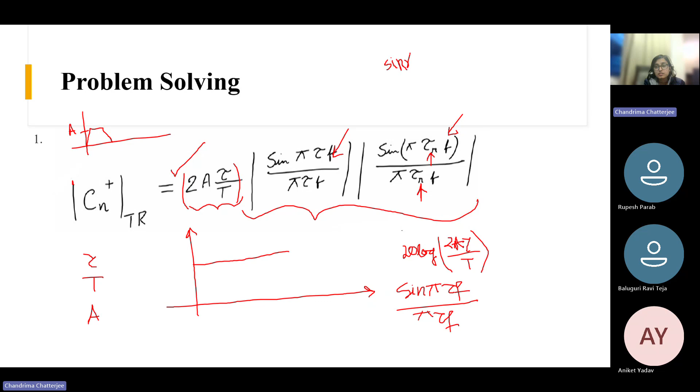when the value of x is very low, we can approximate it; sine x will be very close to x, so x by x will be 1. But when x is much larger, sine x will be at most 1, so the value will be 1 by x when x is large. Fine.

So if you take this, then what will be the asymptote? There will be a break frequency. That frequency will be 1 by pi tau. Okay. Till this point, because this is asymptotic, we can assume it is constant. Then it will have a negative slope of minus 20 dB per decade.

And next we have another portion, this portion. This portion is also a sinc function and we can approximate it just like this, right? The first portion will be constant, obviously. And the second portion we can approximate as 1 by x, so there will be a minus 20 dB per decade slope.

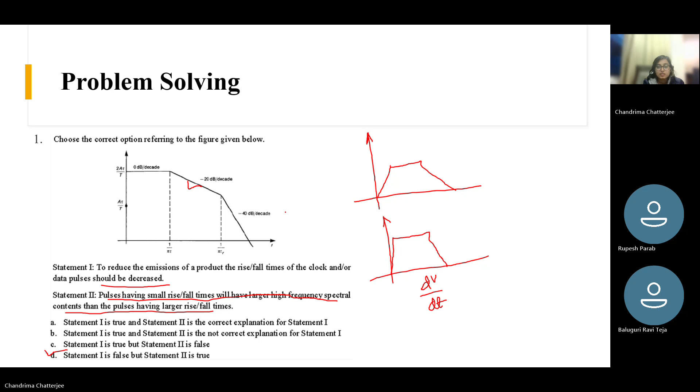So here you can see there is one frequency pointed here, 1 by pi tau, and the second frequency is 1 by pi tau r. These are the two break frequencies, breakpoint frequencies. And where is this coming from? Just follow this expression. What is the term here? Pi tau f. Pi tau f we can also write as pi tau by T. That is one term. Another term is pi tau r by T.

So from here we are getting the first break frequency and the second one. That's why it is written 1 by pi tau and 1 by pi tau r. So how will you get that? Pi tau by T is some angle. If we want to get the frequency, what will we do? Suppose this is some omega t, theta, so it will become 1 by pi tau.

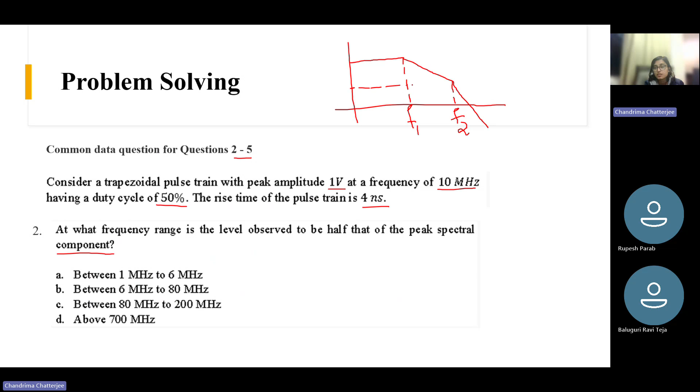So first of all, we get the peak spectral component till this point. This is the peak value. Then it gradually reduces at -20 dB per decade, and then at a higher rate it decays. This is the first frequency, suppose F1, and this is F2. These are the two break frequencies, and this is the peak amplitude. They are asking in which frequency range we will get an amplitude which is half of this value. So suppose at this point this is the half of peak amplitude. So at which frequency range? Suppose at something like this.

Anyway, so what is the first task? The first task is to find out these two frequencies, F1 and F2. So you know what will be F1? F1 is 1 by pi tau. This is the first frequency, right? Where the attenuation begins. So can you calculate and tell what you are getting? So your frequency is given 10 megahertz. You can find out what is your time period. Time period is 1 by f and duty cycle is given 50%. So your tau will be 50% of the time period.

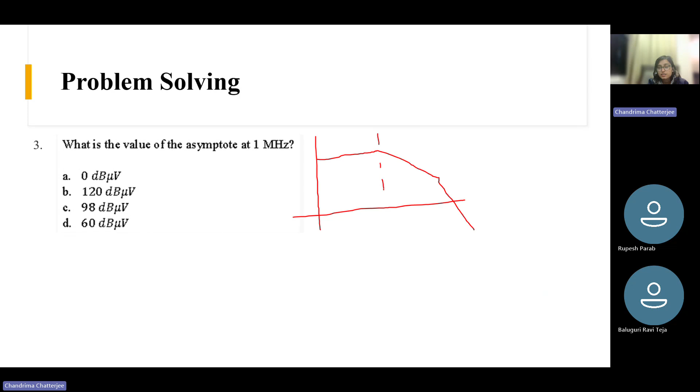Okay, so till this point is it clear? Yes, ma'am. Okay, so what is the value of the asymptote at 1 megahertz? We just now found out that the frequency range is from 6 megahertz to 80 megahertz. So 1 megahertz is obviously below that point; it doesn't fall in that range. We will have to find out the value of the asymptote at 1 megahertz. From start to 6 megahertz, the value is constant. And what is that value? That value is the magnitude, that is 2A tau by T. Okay.

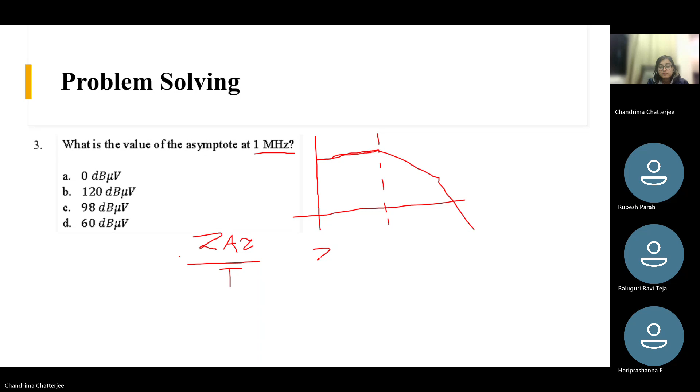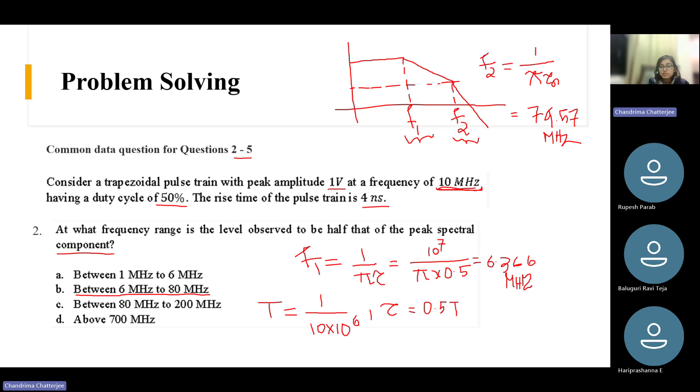That is the magnitude, and we will have to convert it to log scale: 20 log 10 of 2a tau by t. Tau by t is 0.5 because the duty cycle is 50%, and the magnitude is 1 volt, as given. So this becomes 20 log of 1. Log 1 is 0, so this is 0.

So that is 0 dB volt. But here you will have to be very careful: here the unit is not dB volt, it is dB microvolt. We will have to convert it to microvolt.

So we got 20 log 1, meaning 1 volt. If you convert it to microvolt, this is 10 power 6 microvolt. So we are converting it to dB microvolt, and that gives us 120. So 0 dB volt, if you want to convert it to dB microvolt, we will straight away add 120 to it.

Is this fine? Okay, so I have added this question.

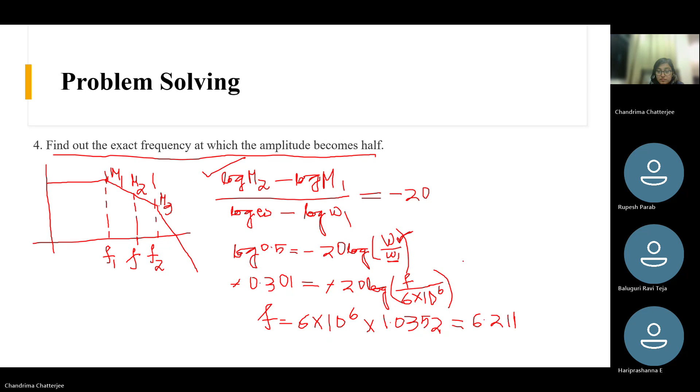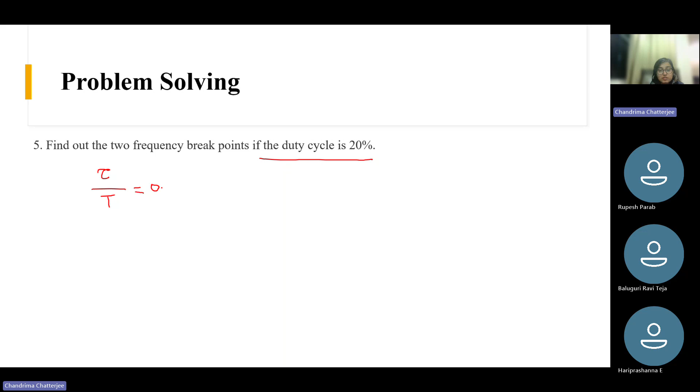So this is very simple, right? We know what is capital T, our time period, because frequency was given as 10 megahertz, so this was 10 power minus 7 seconds, our time period. We just have to multiply 0.2 to find out what is tau. Then the rest is very easy: you just have to find out 1 by pi tau and 1 by pi tau r.

See here, this frequency will remain the same because rise time remains the same. So we don't have to compute this again. This was, I think, 80 megahertz, right? This was 80 megahertz.

Okay, and only this will change the first frequency breakpoint. So basically, this point will change, right? So now we have decreased the tau, that's why this frequency will increase. This frequency will increase. Okay, let's see.

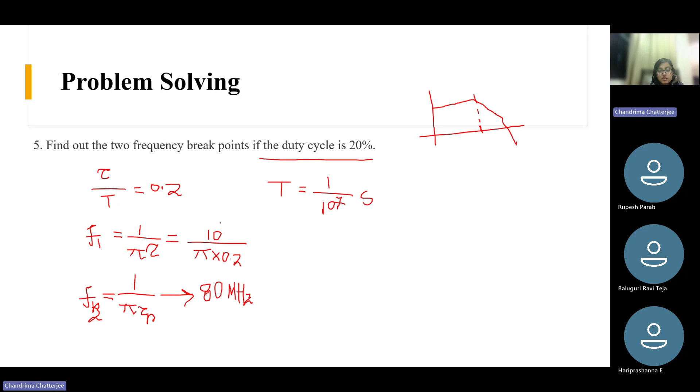So 1 by pi, 0.2, 0.2, and over here we have 10 power 7. Okay. So what is this value? Pi into... so this is 1.591 into 10 power 7, 10 power 7.

Just convert it to megahertz, so 10 to the power 6 will be divided. This is 15.91 megahertz, almost 16 megahertz. So we can see that this frequency has increased. Earlier it was at 6 megahertz, now it has become 15.91 megahertz. Okay.

So we saw what is the effect when we reduce the duty cycle. The more you reduce the duty cycle, the more this first frequency point will increase. It will shift towards this side gradually.

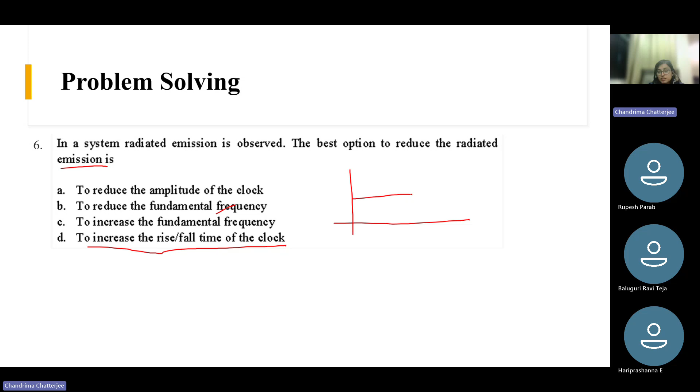So if you reduce the amplitude of the clock, that doesn't serve the purpose, right? Because in that way, your frequency components will still be there. If you reduce the amplitude from, suppose earlier it was here, but now it is here, you are also curtailing your actual waveform because you are reducing the amplitude. And reducing the fundamental frequency also doesn't serve the purpose.

What you will have to do is increase the rise and fall time, as we already discussed towards the beginning - if you increase the rise or fall time, you can shift this point, this minus 40 dB per decade, from where it starts, you can shift this point towards the left, and then you will get more attenuation for the high frequency components. So the way to reduce the radiated emission is to increase the rise and fall time of the clock.

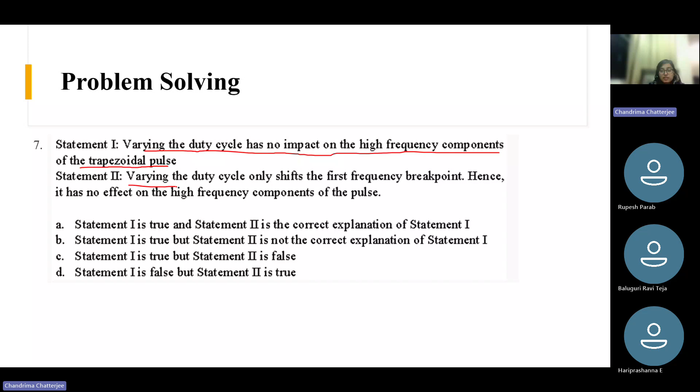The next question: statement 1 is varying the duty cycle has no impact on the high frequency components of the trapezoidal pulse. And statement 2 is varying the duty cycle only shifts the first frequency breakpoint, hence it has no effect on the high frequency components of the pulse. So what do you think? Are the statements true?

First one is true... so we are varying the duty cycle, right? So we are varying tau. When we vary tau, in one question we saw that we reduced the duty cycle, and this first frequency breakpoint shifted towards the right side. It increased, right? From 6 megahertz it increased to 15 megahertz. But does it affect the high frequency components - like what high frequency components you were getting, does it affect it? Now the minus 20 dB per decade slope will start from this point, so this point basically shifts from here to here based on what is your duty cycle. But does the high frequency components change if we change the duty cycle? No, right?

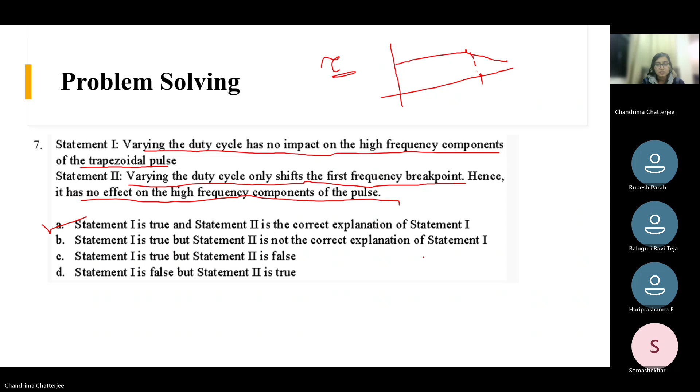Now we will talk a bit about ringing. Most of you must have some experience in PCB designing, so you know that whenever you design a PCB there are some parasitics, right? There will be some parasitic capacitances, some parasitic inductances. Parasitic capacitances are associated with your device. If you're using a semiconductor device, for suppose a MOSFET, there are some parasitic capacitances associated with the MOSFET - the input capacitance, the output capacitance like COSS, CISS, and the transfer capacitance. I think you guys are aware of those things. You also have parasitic capacitances between two points which are at different potentials, and in between there will be some dielectric medium. Also, parasitic inductances we get due to the traces of the PCBs.

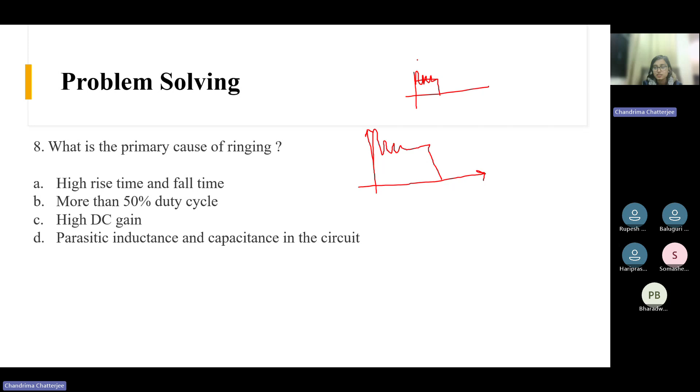So due to these parasitic inductances and capacitances, at a particular frequency they will have resonance, right? And that frequency will cause some oscillations in your actual waveform. Suppose it was supposed to be a perfect square wave, but instead you will get some oscillation, and gradually it will die down because there are some dissipative, resistive components also in your circuit that help damp out this oscillation - but you will get this ringing. That is called ringing. Due to that, there are some overshoots and undershoots in your waveform. In some amount they are okay, but if they are too high, then it may cause damage to your circuit, and it may also cause emissions, radiated emission as well as conducted emissions. So you will have to control this ringing.

So what is the primary cause of ringing? Obviously, the options are high rise time and fall time, more than 50% duty cycle, high DC gain - no, these three options are not correct. The parasitic inductance and capacitance in the circuit, this is the correct option.

But I think for the previous option there could also be a possibility of di/dt, right - the high rise time and fall time. Yes, that is correct, because if your di/dt increases, your inductance voltage also increases, right? Yes, definitely. So if you have a very steep rise time and fall time, in that case you will get very high dV/dt as well as high di/dt. These are basically responsible for your EMI, for your emissions, obviously. But the ringing happens whenever there is some exchange of energy between inductances and capacitances - this kind of oscillation comes when you have coupling between the inductance and capacitance, like an LC circuit, oscillator kind of thing.

Right. So the inductance will provide some energy, the capacitor will get charged, and eventually again the capacitor will discharge. So there is an exchange of energy between an inductive element and a capacitive element, and that causes this oscillation. So if we are specifically talking about ringing, then this is the main cause, right?

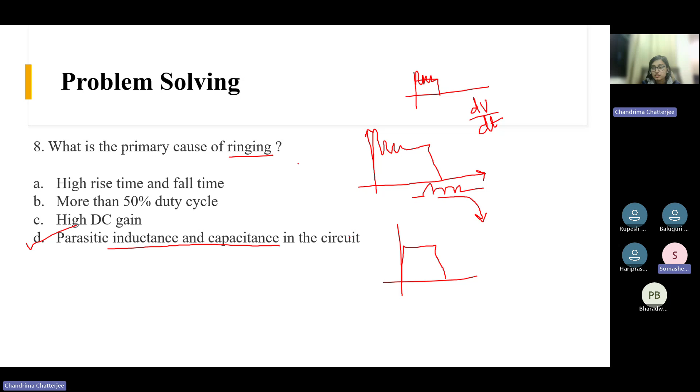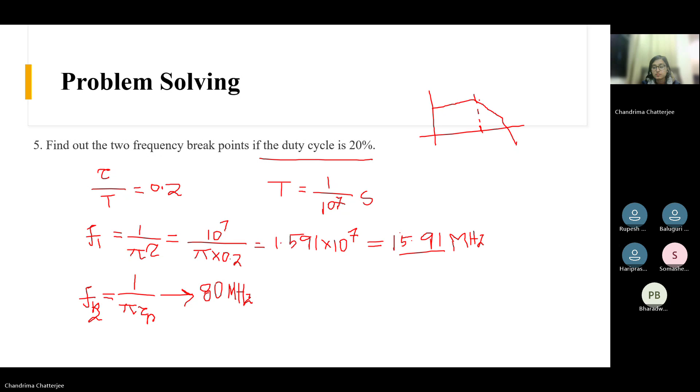So did you join just now or were you there? Yes, ma'am. I have just joined now. Okay. So just to give a brief concept of what we just discussed, I will go to the first slide.

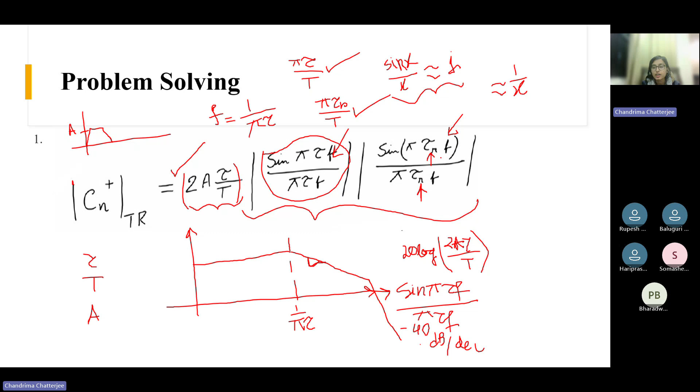Then we have one breakpoint frequency at this point, which comes due to this portion, where we get minus 20 dB per decade slope. After that, we have a similar sinc function at a frequency 1 by pi tau r, where tau r is the rise time. It also contributes minus 20 dB per decade, but we already had a slope of minus 20 dB, so they add up, and we get effectively minus 40 dB per decade slope from this point onwards.

So if the rise time is too low, then this second frequency, 1 by pi tau r, becomes very high and shifts towards the right. So the attenuation that you will get is only minus 20 dB per decade, not minus 40, till this point. Minus 20 is almost like losing half of the signal, but for high frequency components we want more and more attenuation, because those are undesired components.

We don't want them. So the more attenuation we get, the better. The earlier we start to get minus 40 dB per decade attenuation, the better it is for reducing the noise, right?

Again, it depends on the application, ma'am, whether you're talking about microwave signals or kilohertz frequencies. So depending on the application, we choose which attenuation is required. Yes, this is just a general discussion, but for a particular application you may require a particular frequency component. Based on that, you will have to set the frequency and these break points.

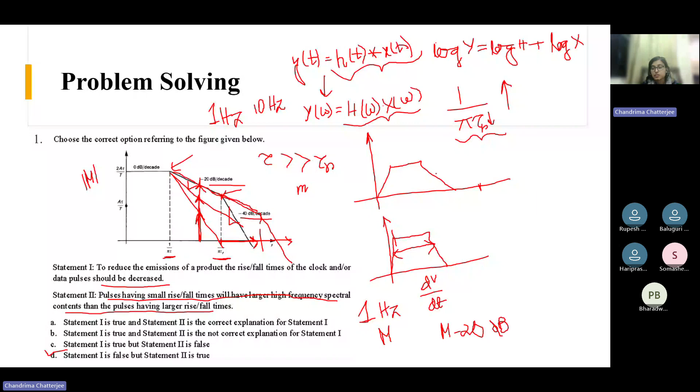Okay, ma'am. Yeah, if it is amplification, then it will be plus 20 dB. This is just a form of representation to make the calculations easier. That's it. Yeah, I agree.

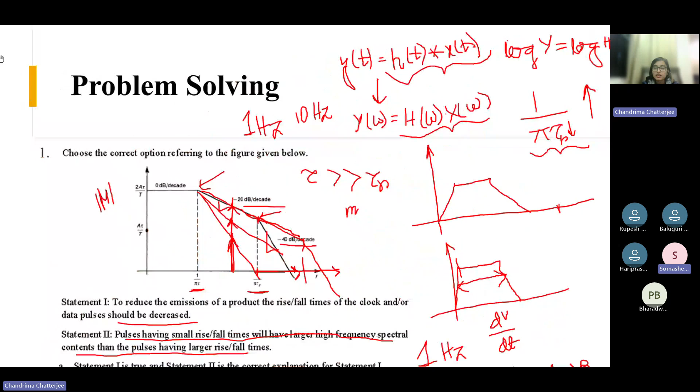Thank you. Ma'am, in what applications will we have plus 20 dB? That I will have to see, I am not sure at this point. There may be some application. Madam, can you correct me? If you take a band pass filter, the rise will be positive, and a high pass filter also. Yes, exactly, a high pass filter, for example.

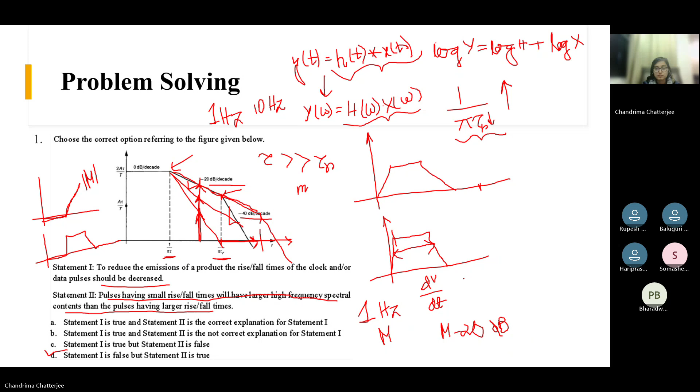In that case, we want to allow the high frequency components and attenuate the low frequency components. So the asymptote will be something like this. It will be positive, plus 20 dB. Exactly. And for band pass, we will have something like this, so we will allow a band of frequencies. Okay, so till this point we did.

Okay, which of the following is the primary effect of ringing on a pulse with respect to EMI or EMC? Ringing affects the amplitude of the pulse. Ringing affects the fundamental frequency of the pulse. Ringing affects the high rise time of the pulse. Ringing affects the spectral magnitude of the pulse.

Okay, so the correct option is ringing affects the spectral magnitude of the pulse. This is the most pronounced effect of ringing. Okay. So we will take an example to see the effect of ringing. Okay, so see this question.

The increase of the spectrum due to a 1 megahertz square wave having V naught equal to 5 volt and two ringing waveforms having the same K and alpha and ringing frequencies FR1 and FR2 respectively. Okay. So there are two ringing frequencies. Suppose you have this, and then over this you have a ringing like this. And then suppose this, and there is a ringing with some negative.

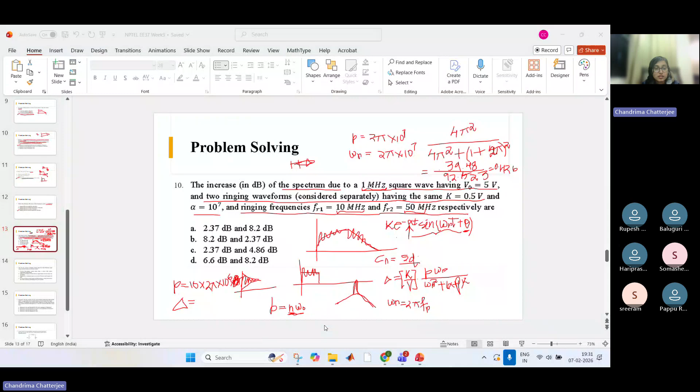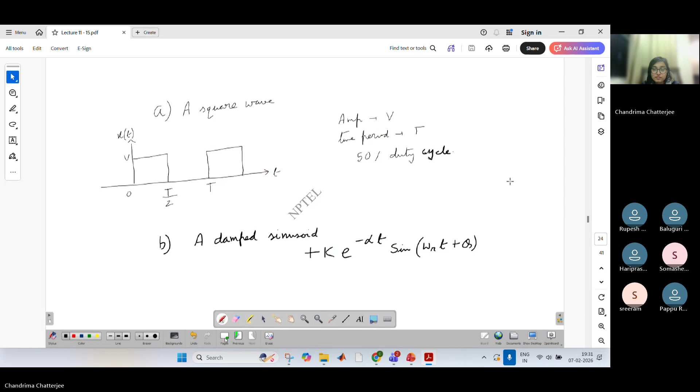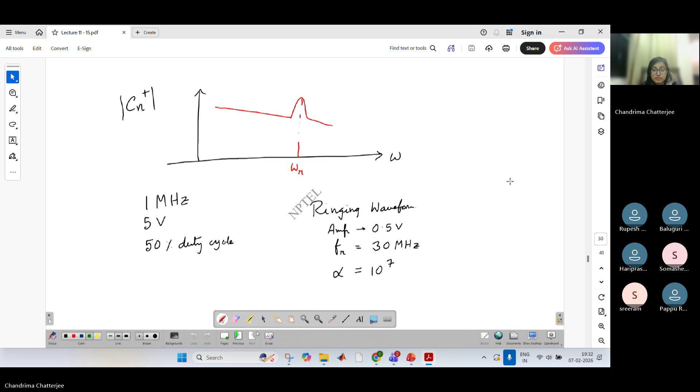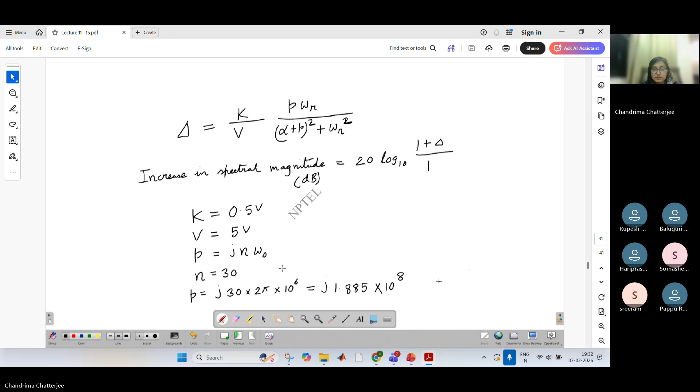So plus, and after that we have also this k by v, right? K is 0.5 and V is 5. So this is 1 by 10. Okay, so divided by 10 plus 1, log. So I think I am doing some calculation mistake. Just a sec. Let's see. For the ringing, we will see. Megahertz, okay. Anyway, the process is fine, but maybe I'm doing some mistake.

Just you calculate and in the next class you tell me what is the answer. I am getting some value. You understood the process, right? How we will do it. So just calculate it for 10 megahertz and 50 megahertz and tell me the correct option. Otherwise, we can discuss it in the next class, okay? Okay, madam. Okay, so let's proceed.

So how does the selection of damping constant impact the trade-off between signal integrity and EMI reduction in electronic circuits? The first option: choosing high damping constant always leads to superior EMC without compromising signal integrity. Now, that is not true. Why? Because whenever you choose a high damping constant, there will be some dissipative element in the circuit, and that will also affect your actual useful signals. So they will also get affected.

So you can't always maintain the signal integrity completely with a high damping constant; that will also affect your other signals. Your EMC performance will improve because you are introducing damping, but your signal integrity will get affected. Opting for low damping constant improves signal integrity but may increase the risk of EMI. Then, damping has no significant impact on the trade-off. And the last: the trade-off is solely determined by the circuit's complexity; damping is not a relevant factor.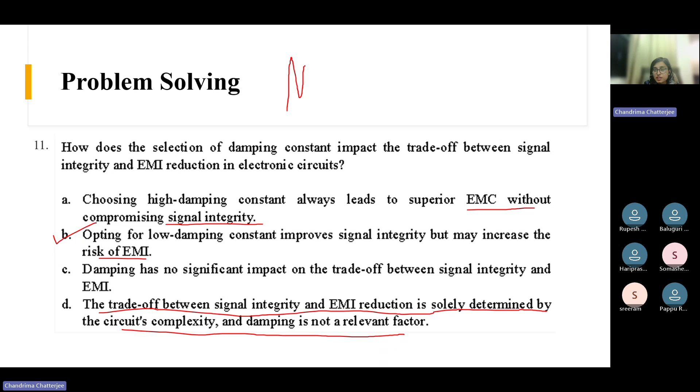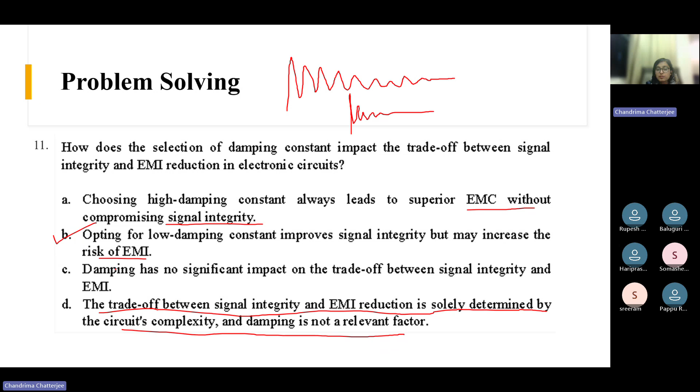So basically option B is correct. Opting for low damping constant improves signal integrity but increases the risk of EMI. Low damping means the ringing signal will continue for a very long time, so it will get damped very slowly. If you have very high damping, then it will damp fast. So if your damping constant is low, then risk of EMI increases. Fine.

Then we have another question. The time constant of an RC circuit should be much greater than the pulse width tau to significantly reduce the high frequency spectral component of the output. And statement 2 is: the capacitor gets sufficient time to charge up to its final value before the pulse switches off and the output appears as a sawtooth waveform. Okay, so what is it saying?

Suppose you have an RC circuit, and in the input you have a pulsed waveform like this. This is the input waveform and you are seeing your output across the capacitor. This is your V out. Suppose we name this x(t), and x(t) is like this.

x(t) is like this. Okay, square wave pulse, simple. This is time period T and this is tau. This duration is tau. Okay, this you are feeding to this RC network, RC circuit. Okay, suppose your RC constant, you know, right, what is RC constant? So the capacitor will get charged via this resistance. Okay, and the time constant is RC. This is the time constant.

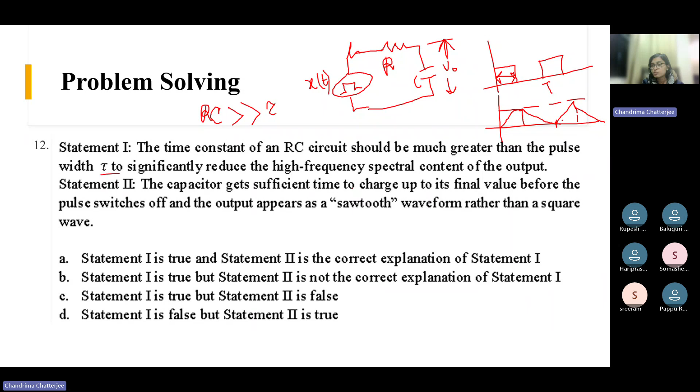And it is saying that if that is the case, then the high frequency spectral content of the output is significantly reduced. So how do we connect it with the high frequency spectral content? Just by intuition, even without any calculation, you can see that the slope here is much lower. It is gradually increasing and then gradually decreasing. So your high frequency spectral component will reduce because the slope is very low, very smooth, compared to this sharp square wave where the rise time is 0 and the fall time is also almost 0.

And if you take the opposite case where your RC constant is much lower than your tau, what will happen? We can draw it. This is your pulse and it will quickly get charged because your time constant is very low, and reach this value. And while discharging it will discharge like this. You can see the waveform is much sharper than this one, where it was gradual. So here your high frequency content will be higher. So the first statement is obviously true.

The capacitor gets sufficient time to charge up to its final value before the pulse switches off and the output appears as a sawtooth waveform rather than a square wave. This statement is incorrect. Why? Because if your RC time constant is much higher, you get a sawtooth waveform, that is correct, but it doesn't get sufficient time to charge to its final value. So that portion is incorrect. Statement 1 is true, but statement 2 is false. Option C is the correct option.

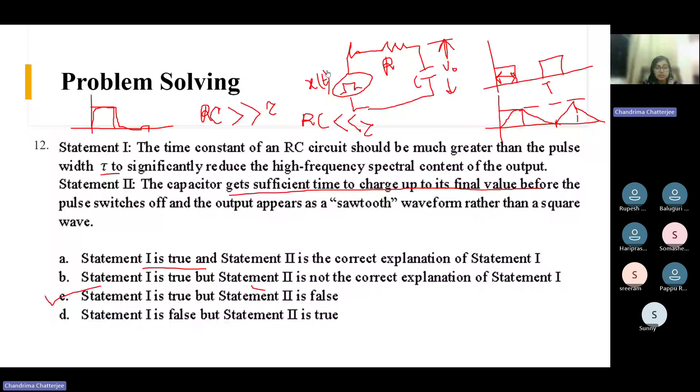Okay, so I think this is the last question. A 20 megahertz square wave is passed through a low pass filter. So this is an LR circuit. This is the L, this is the R. If the square wave has a duty cycle of 50%, the high frequency spectral content is significantly reduced if...

Yeah, sorry, do you have a question? No, ma'am.

Okay, so this is an LR circuit, and we are giving a pulsed waveform in the input, and the duty cycle is 50%. Then the high frequency spectral content is significantly reduced if... Now for the LR circuit the same concept we can apply. Here the time constant is L by R. Earlier for an RC circuit it was RC, here it is L by R. We can name it tau LR. This is the time constant.

So here the inductor will be energized via this resistor, and when you withdraw the pulse, it will get discharged. This is the input pulsed waveform. When the high frequency content will be low, we will get a sawtooth waveform, because the change is gradual, not very sharp. And when it resembles a square wave, that's when the high frequency content increases. But for that, your L by R time constant must be much lower than tau. This is for when your spectral component is high, and for this case, your spectral component will be low.

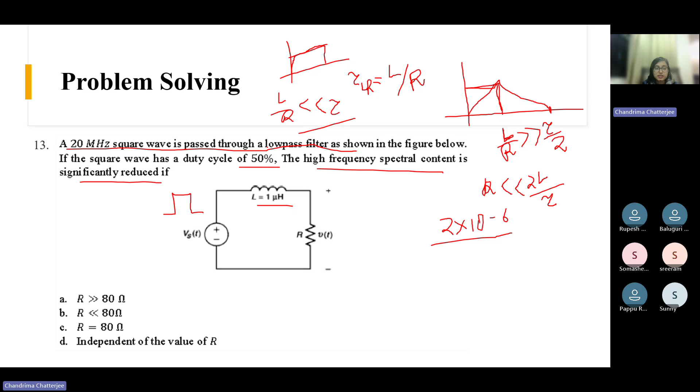So why is the high frequency content low when we are getting this kind of waveform? That is clear, right? Yes, ma'am.

Okay, so I think this was the last question. Do you have any doubt about any question or any concept? In this case, ma'am, what do you mean by high frequency spectral?

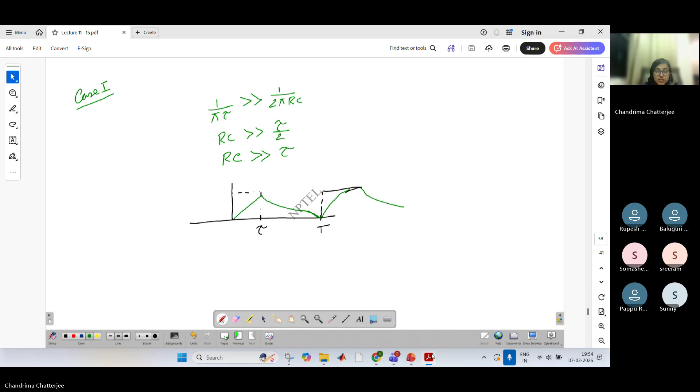Okay, and just a second, I will let's see, I think I have...

Yeah, so see over here. So this is written for RC. So if you just convert it to the frequency, so this is 1 by 2 pi RC. RC is the time constant. And if you want to convert it to angular frequency, so this is 1 by RC. So basically what we are trying to do over here is, this is some time constant which is L by R.

And what is your first breakpoint? If you remember, it was 1 by pi tau, the first breakpoint frequency. So we are comparing it with this, the breakpoint frequency. You remember we computed this, right? So 1 by pi tau, this was the first breakpoint frequency.

And then this is a time domain quantity, L by R. So if you just want to convert it to frequency, we will take the reciprocal, right? R by L. Obviously, because we know F is equal to 1 by T, right? Frequency is 1 by time period. And then if we want to convert it to angular frequency, it will be R by L.

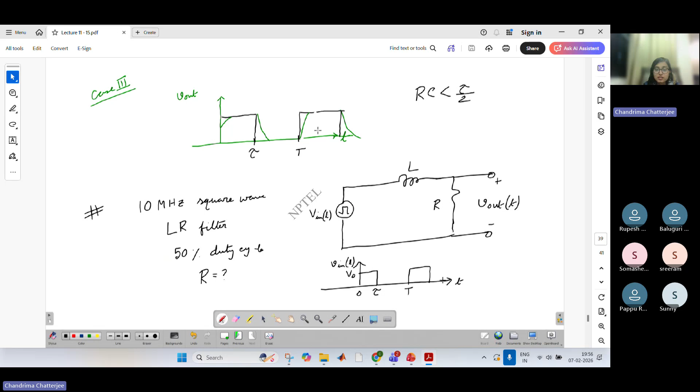You understood, right? Yes. So this is for RC circuit, and similarly we can go for RL circuit. I think they have given some example.

So just converting it to frequency, and then this 2 pi term, and here this pi term comes, and from this extra 2 term is coming, I think.

So L by R time constant should be greater than half of the pulse width, right, ma'am? That's what the equation is saying. Right. Yes. Okay, thank you.